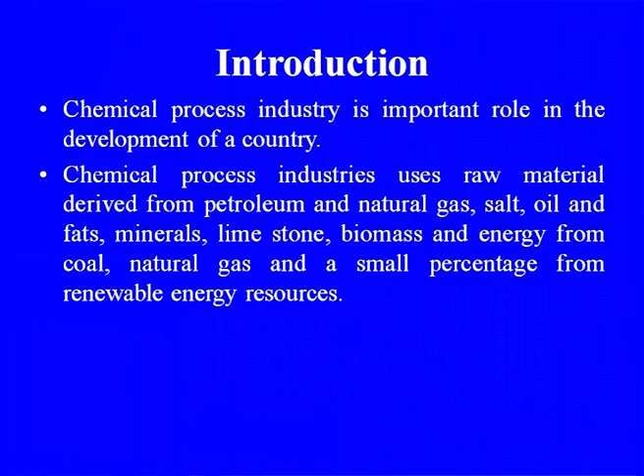The chemical process industry plays an important role in the development of the country. It uses raw materials derived from petroleum and natural gas, salt, oil and fats, minerals, limestone, biomass, and energy from coal, natural gas, and a small percentage from renewable energy resources, because energy is an important segment in the total cost of production in the chemical industry.

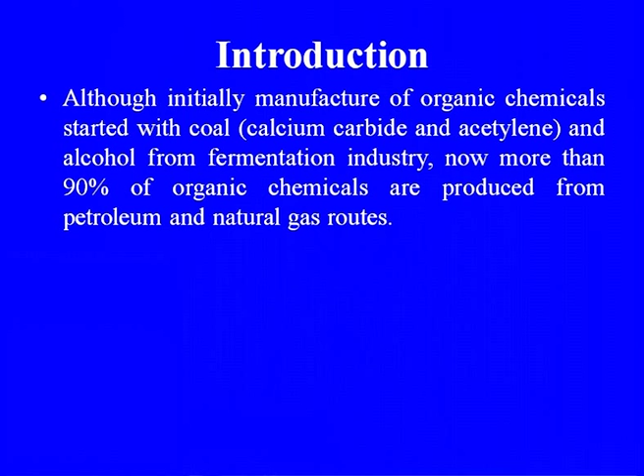As discussed in the earlier lecture, manufacture of organic chemicals initially started with coal, that is acetylene from the calcium carbide route, and alcohol from the fermentation industry. Now more than 90% of organic chemicals are produced from the petroleum and natural gas route, a development that has taken place because of the availability of petroleum products from refineries.

But as we see, all these raw materials are becoming more and more scarce. So again we are rethinking to utilize our old raw materials like coal, biomass, or alcohol for production in the organic chemical industry.

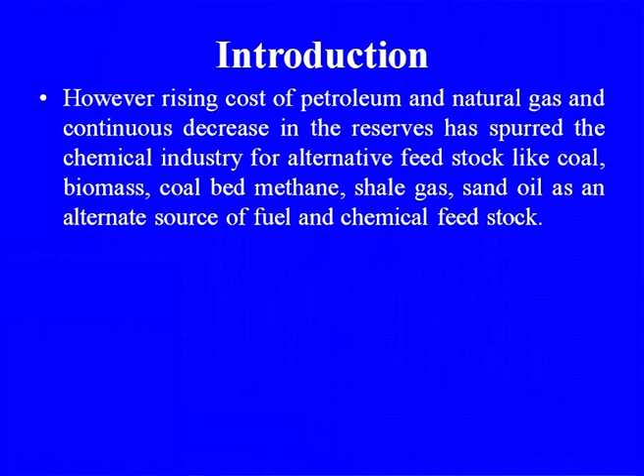Another problem is the rising cost of petroleum and natural gas, and the continuous decrease in reserves, which has spurred the chemical industry to look for alternative feedstock like coal, biomass, coal bed methane, shale gas, and sand oil as alternative resources of fuel and chemical feedstock.

Shale gas and sand oil are areas where other parts of the world are still working to utilize these resources more effectively, because sand oil is a slightly heavier, very heavy crude. Even some oil available in India, such as Rajasthan crude, has high TAN acid and high sulfur compounds. So these are some of the problems in utilization of new raw materials.

Coal remains the dominant source of energy. We are now discussing the energy resources available for the chemical process industry, because without energy nothing can be done, we cannot run a plant. So energy resources are very important.

Coal was the dominant source of energy, meeting about 52.4% of India's primary energy needs, while oil and natural gas met 41.6% of the energy requirement in 2008-9. The power sector accounted for 77% of non-coking coal offtake.

As per Planning Commission projections, till 2032 coal will continue to have a dominant share, meeting over 50% of the primary commercial requirement.

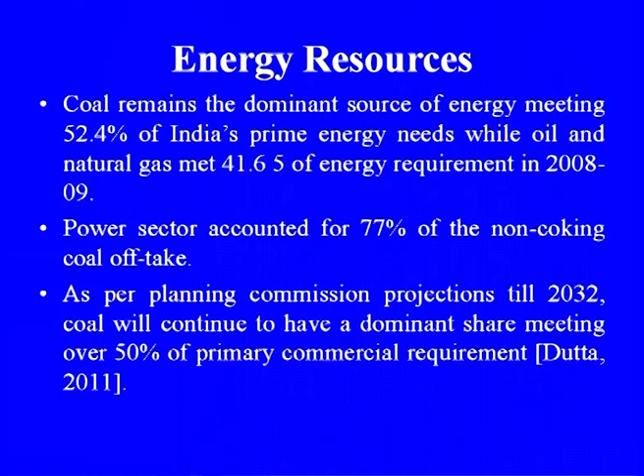The world and India energy consumption scenario is shown in the figure in Module 1.4, which you can go through.

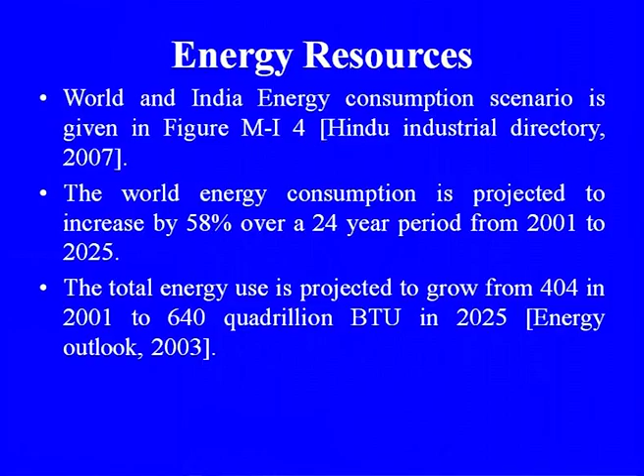World energy consumption is projected to increase by 58% over the 24 year period from 2001 to 2025. Total energy use is projected to grow from 404 quadrillion BTUs in 2001 to 640 quadrillion BTUs in 2025. This is the change taking place because of the fast development occurring.

India's requirement of fossil fuels by 2030, as estimated by various agencies, is in the range of 337 to 462 million tons of oil, 99 to 184 million tons of oil equivalent of gas, and 602 to 954 million tons of coal. That is the requirement being projected.

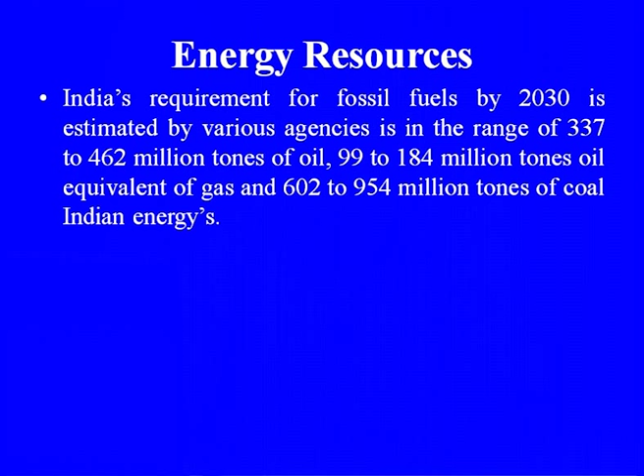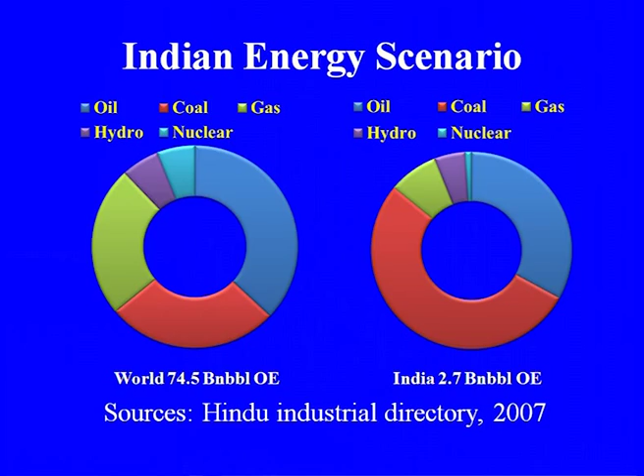This is the scenario of oil, gas, and hydropower and nuclear power that we are using. Nuclear power is actually a small portion of the total energy requirement that we have.

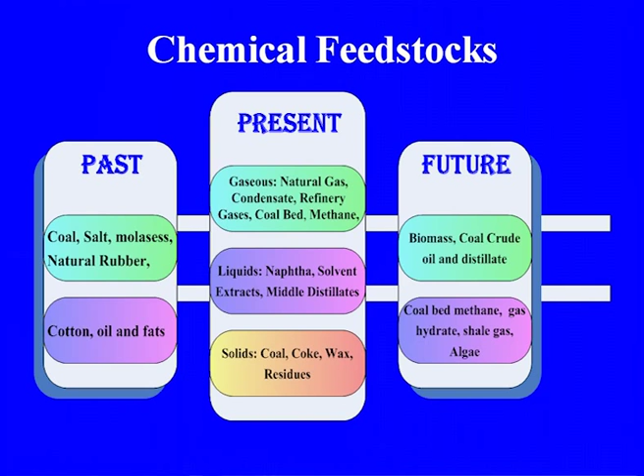In the future, we are again moving in a big way towards alternative raw materials: biomass, coal, crude oil and distillate, coal bed methane, gas hydrate, shale gas, and algae as fuel. People are also working on production of alcohol based on algae, though the cost of producing alcohol through the algae route remains a problem. So the future raw material may also include algae.

Primary raw material - the raw material you are using may be primary or secondary. So gaseous: natural gas, condensate, refinery gases. Condensate that we are getting from the heavier fraction of natural gas while processing it. Now some units are coming from ONGC who are going to utilize the condensate. Some condensate is rich in aromatics, and we can extract the aromatics from it. Then refinery gases, coal bed methane, gas hydrate, liquids - naphtha, kerosene, gas oil, middle distillate; solids - coal, coke, wax, and residue.

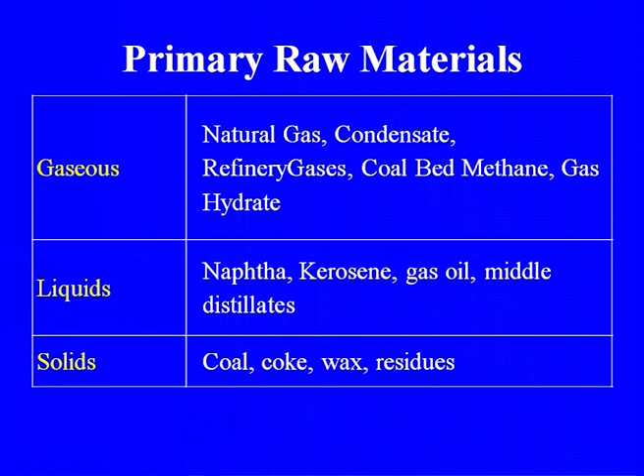Oil and fats - tallow, coconut oil, palm oil, and other oils that we use in the soap industry. Biomass, alcohol, paper, energy that we are using, and some future scope is also there for the biomass route.

The alcohol route from molasses - we still have more units for that, and most alcohol is made from molasses. But biomass to alcohol is again one of the big challenges, because of lignin - removal of lignin, the pre-treatment part, the cost of pre-treatment of biomass is more. But a lot of work has been done, so in future we may have some biomass-based alcohol plants also.

Salt - as I told you earlier, the sea is rich in resources, whether oil, minerals, or salt, and salt is used as a raw material. Salt is very small, but you will find its use is not only for edible purposes. A large number of industries are based on salt as a raw material, and products from these industries form the backbone of many chemical industries - chlorine, caustic soda, soda ash. These are products that we use in some form in most industries.

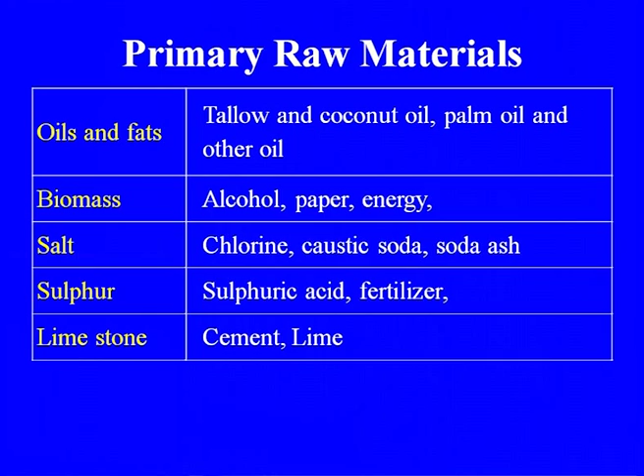Limestone for the manufacture of cement, and lime that we use - lime is also again a raw material for many chemical industries, and one of the major uses is also in the paper industry during the recovery of chemicals.

Paraffins - methane, propane, butane, and higher hydrocarbons. Now paraffins are important because methane is available in natural gas, and propane that we get from various processes is also there in natural gas. So how to convert this methane or propane to more value-added products? From propane to propylene, methane to olefins - these are the developments taking place. Olefins and derivatives: ethylene, propylene, butadiene, alcohol, vinyl chloride.

Acetic acid, vinyl acetate, etc. These are some of the chemical intermediates which find large application in making a large number of chemicals.

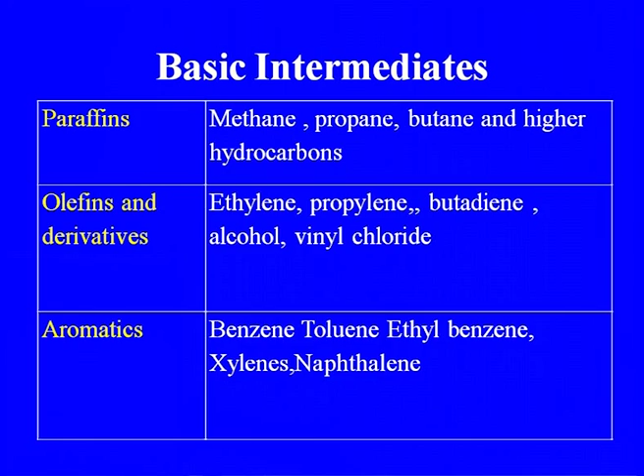Aromatics - benzene, toluene, ethyl benzene for styrene, xylenes - especially ortho and para, which are very important. Naphthalene - sometimes we get naphthalene from the coke oven plant, and naphthalene is one route for making phthalic anhydride.

Although we are now making it from orthoxylene, because orthoxylene is available from paraxylene plants.

Monomers for polymers - ethylene, propylene, vinyl chloride, styrene. These are some of the monomers for major polymers which we make, whether it is polythene, polypropylene, PVC, or polystyrene, or even styrene used in the rubber industry.

Monomers for synthetic rubber are styrene, butadiene, chloroprene, isoprene. Actually isoprene is available in the FCC or cracker gases, but we are still not recovering it - about 8% of the FCC C5 gas is isoprene, which can be recovered and that can provide supply.

Styrene - ethylene and benzene are the two raw materials for making ethyl benzene, and ethyl benzene for styrene. Already some petrochemical complexes, just like the Panipat refinery, are going for the manufacture of styrene butadiene rubber. Earlier we used to make styrene through the alcohol route - alcohol to ethylene, and ethylene to styrene.

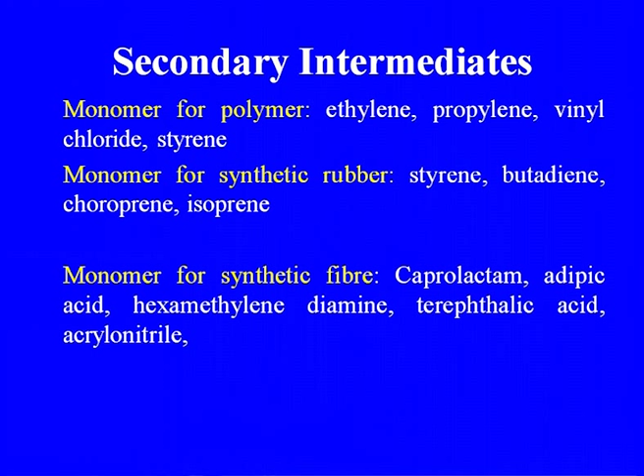Monomers for the synthetic fiber industry - caprolactam for nylon 6, adipic acid, hexamethylenediamine for making nylon 66. Still we are not making nylon 66; most nylon is based on caprolactam, that is nylon 6. Terephthalic acid, and acrylonitrile for making polyacrylonitrile - you are seeing huge changes in the woolen industry because of polyacrylonitrile fiber, which has wool texture and a fluffy nature. Even acrylonitrile finds application in making some specialty polymers and rubbers also.

Secondary intermediates mean the products which are getting from the refinery or the petrochemical, that are being used as intermediates for the agrochemicals, intermediates for the dye stuff industry. You take the case of aniline, that is coming from the aromatic plants where we are using benzene, and from aniline.

That is one of the major raw materials for dye stuff. Intermediate for explosive, one of the earlier explosives used to be TNT. That was actually from toluene and nitrotoluene, used as an explosive, and still we are making explosives. Intermediate for RDX, that is also from there, we are using formaldehyde. So this is how some of the primary feedstocks play an important role in providing the secondary intermediate which find application as a finished product.

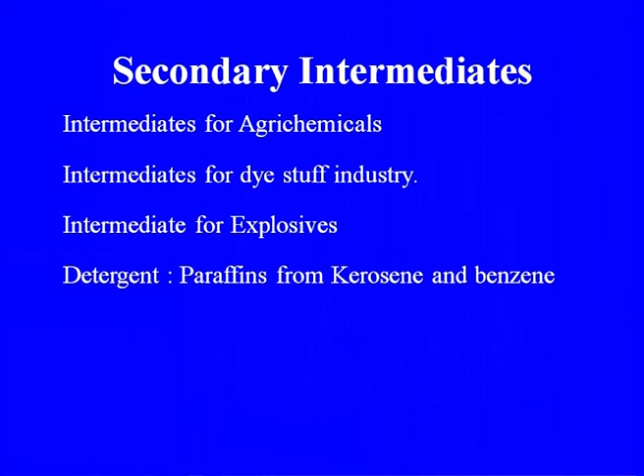Similarly, take the case of detergent, paraffins that we are extracting from kerosene, and the paraffin that is converted to olefins, and this olefin is alkylated with benzene, so they were getting the linear alkyl benzene. So these are some of the secondary intermediates that we are using.

This is how the feedstock for the organic chemical industry, it may be petroleum, coal, fermentation, oil and fats, and the various products derived from petroleum, coal, or fermentation industry, or from petroleum: ethylene derivative, propylene derivative, C4 hydrocarbon, synthesis gas derivative, aromatic cyclic compound. From coal: benzene, toluene, because earlier most of the requirement was met through the coke oven plant, but at that time the consumption was much less, and the organic chemical industry was not much developed.

At the same time the yield of aromatics from coal is much less, so that was the problem in case of coal. But as a byproduct we are still using that benzene, toluene, naphthalene, also pyridine, because from coal a large number of chemicals, inorganic and organic, can be produced, and we are producing that through the recovery part.

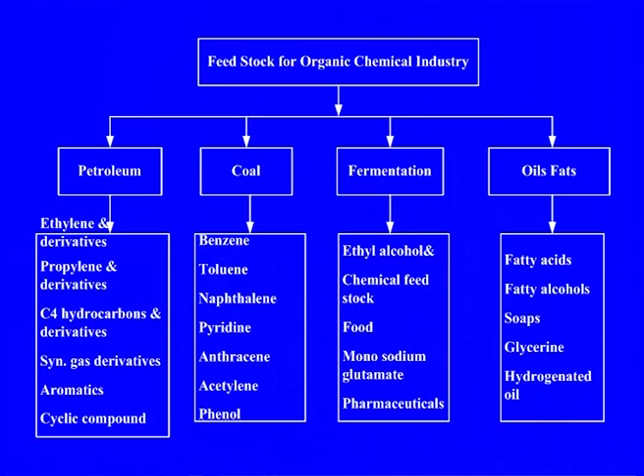Oil and fats: fatty acids, fatty alcohols, soaps, glycerine, because glycerine is going to be one of the very important raw materials in the future for the chemical industry, and you can still produce a number of value added products from glycerine.

From biomass, as I told you, processing the biomass has some problems because of the presence of lignin, and pre-treatment is required. But the number of products that we can derive from biomass, starting from methane, pyrolysis gas, pyrolytic oil, ethanol, food, single cell protein, sugars, chemicals, ethanol, methanol, acetic acid, butanol, vanillin, oxalic acid, acetone.

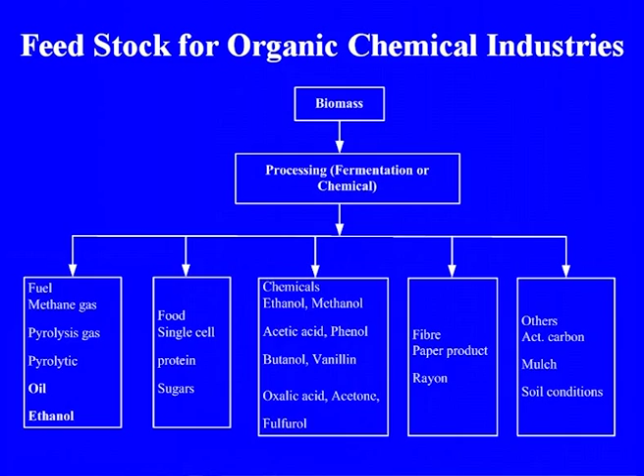Phenol means phenol, that is the cumene route that you can go. The fiber, paper products, rayon, others, activated carbon, mulch and soil conditioner. These are the products that you can get from biomass.

Now I will discuss some of the products which are getting from the petroleum route, and the various petroleum fractions which are being used as a basic raw material in the petrochemical industry.

First major product is the natural gas and the refining gas, because there are two sources of natural gas. One we are getting directly from natural gas. Second is the natural gas we are processing after the processing of crude oil, which is separated, that we call the associated gas. Third is the refining gases which we are getting during various processes.

The refining gases contain methane. So these are some of the natural gas sources where crude oil distillation, catalytic cracking, catalytic reforming, all the processes produce gases which may find use, or are being used, for the production of chemicals. Composition: methane, ethane, propane, butane, boiling point up to 25 degrees centigrade, that is the fraction in the case of refinery, because after that the gasoline fraction is there.

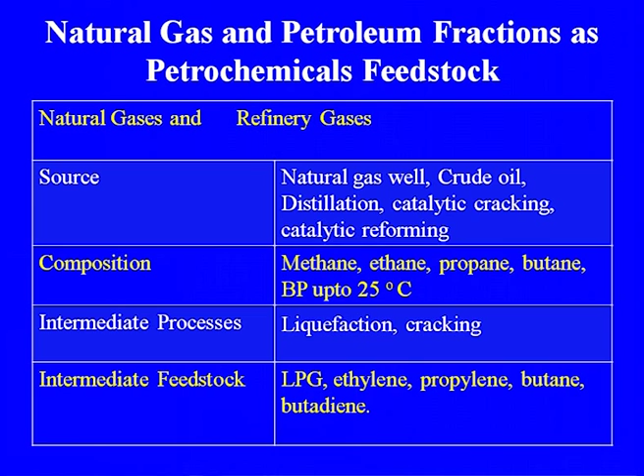Intermediate process: liquefaction, cracking, intermediate feedstock, LPG, ethylene, propylene, butane and butadiene, which find application in the manufacture of other products. LPG is being used as a fuel, but it can also be used for the manufacture of aromatics through the cyclization process. So these are the products which are being used for the manufacture of some other important intermediates.

Naphtha is one of the most versatile feedstocks we are getting from the refinery. The gasoline, which is also a naphtha, but higher octane naphtha is only being used as gasoline or straight-run gasoline. The rest of the naphtha has to be processed to more value-added products, either through catalytic reforming or catalytic cracking of the naphtha. These are some of the sources from the refinery which undergo distillation and thermal and catalytic cracking, hydrocracking, visbreaking. This is why we call it straight-run naphtha and cracked naphtha, both obtained from various processes, with boiling point range 70 to 200 degrees centigrade.

As I told you, the higher boiling point fraction we get as naphtha has a lower octane number, so that's why it cannot be used directly. At the same time, the octane number requirement has been changing - earlier vehicles needed 70 octane number, now we are talking about 100 plus octane. How to meet that requirement? Just for the improvement of the octane number, there is a secondary process that we do, which we will discuss while covering petroleum refining and petrochemicals.

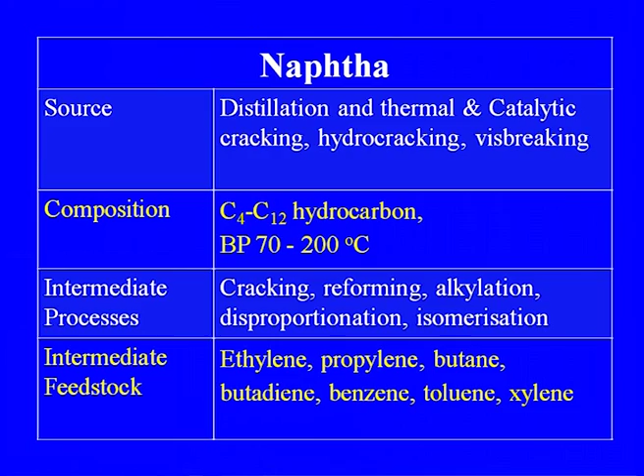So, composition of the naphtha is C4 to C12, boiling point 70 to 200 degrees centigrade. Intermediate processes include cracking, reforming, alkylation, disproportionation, isomerization. Intermediate feedstocks we get from naphtha include ethylene, propylene, butane, butadiene, benzene, toluene, xylene. These are some of the intermediate products we get either from naphtha cracking or catalytic reforming of naphtha, or now in the refinery we also have the isomerization process, which is mostly for production of high octane gasoline from low octane naphtha.

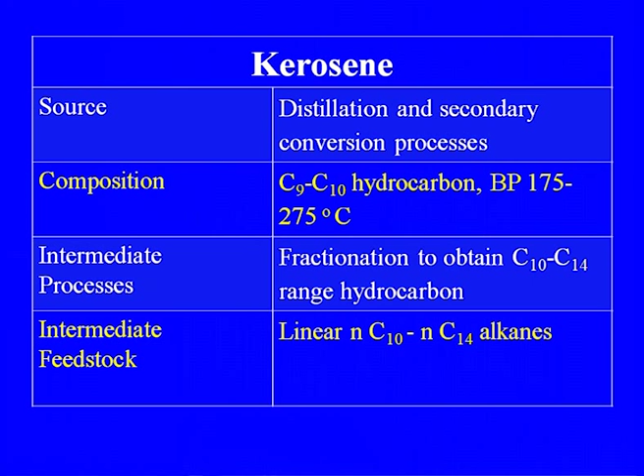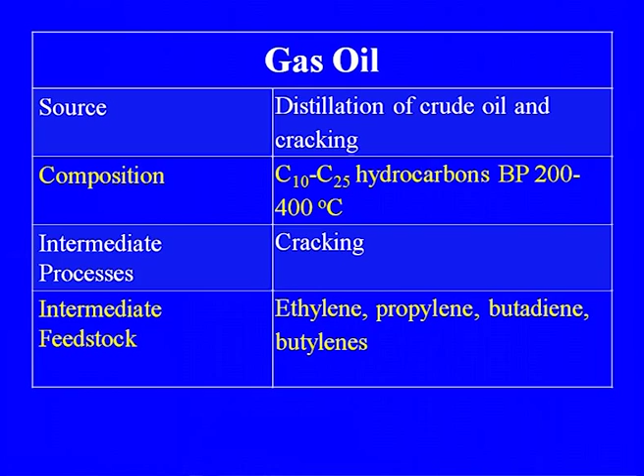Kerosene - although the major portion of kerosene is used as fuel, a good amount of kerosene is required for the manufacture of linear alkyl benzene. So what we do is fractionation of the kerosene, and after fractionation we take the carbon atoms from 10 to 14, because for better biodegradability this carbon number is very important. It may be C10 to C14, but more preferably C11 to C13 carbon alkanes are required. In the LAB plant, we fractionate the kerosene and extract this portion of alkanes from the kerosene, and the rest of the kerosene is recycled to the fuel system for blending.

Gas oil is the heavier portion we get from crude oil distillation and from cracking during the process. In cracking or hydrocracking, the remaining portion of heavy residue from atmospheric and vacuum distillation columns is further processed in the secondary conversion process for more value-added products. Major products come from cracking - gas oil cracking can also be done, but considering the cost and product complexity, since it gives less ethylene and propylene and more heavier fractions, some plants are still operating based on gas oil for olefins. That may be a future source for olefins in the gas cracker, because in the reactor for naphtha cracker too, a lot of development has taken place, which we will discuss while covering petrochemicals.

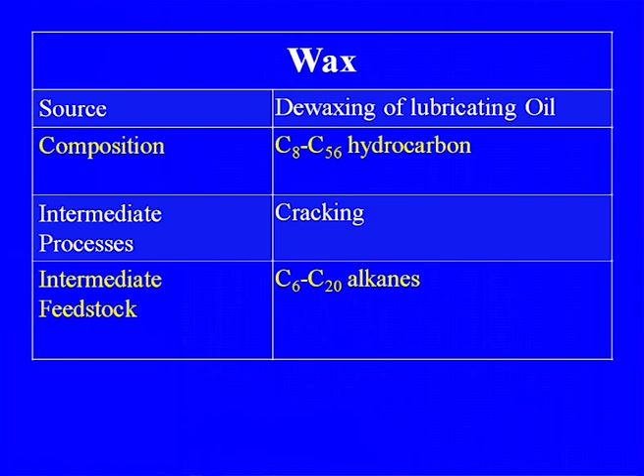Wax - in case of more paraffinic crude oil we get wax, and after cracking the wax we can get alkanes which can be further cracked, and we can use them for the production of some higher alcohols and higher hydrocarbons.

Pyrolysis gasoline is the product we get from the ethylene cracker, meaning the naphtha cracker or the gas cracker, and that pyrolysis gasoline is rich in aromatics. These aromatics can be utilized effectively.

It can be mixed with the reformate and processed in the aromatic production plant. The only additional requirement in case of pyrolysis gasoline is the removal of sulfur from it.

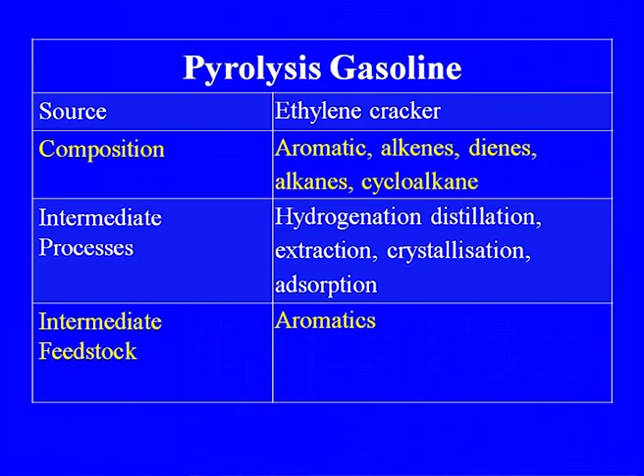These are some of the sources of pyrolysis gasoline, and some of the processes involved in the separation of pyrolysis gasoline are distillation, extraction, and hydrogenation, meaning hydrodesulfurization of pyrolysis gasoline for removal of sulfur. Crystallization and adsorption are processes normally used for separation of paraxylene from metaxylene.

Similarly, extraction is used for close boiling point aromatics and non-aromatics. The intermediate products we get from this pyrolysis gasoline are benzene, toluene, and xylene.

Petroleum coke, as I told you earlier, is called petro coke or petroleum coke. With the utilization of more and more heavier fuel, petro coke production has increased. Earlier, the petro coke produced at Panipat or Jamnagar was being used by cement plants as fuel.

But now petro coke can be used for gasification, and from gasification you can produce synthesis gas, you can produce hydrogen, or it can be used in fertilizer plants along with coal, because petro coke has higher carbon than conventional coal.

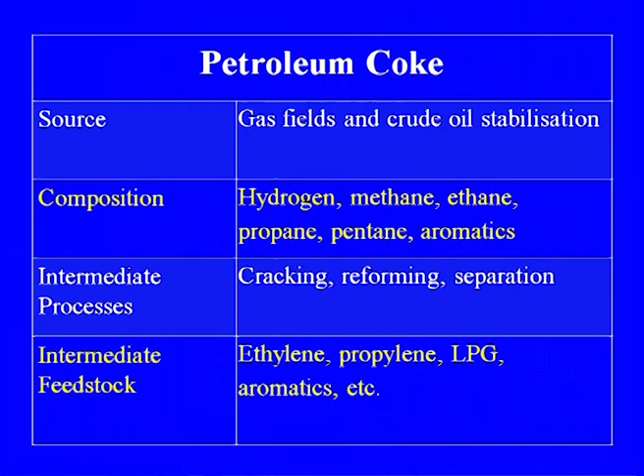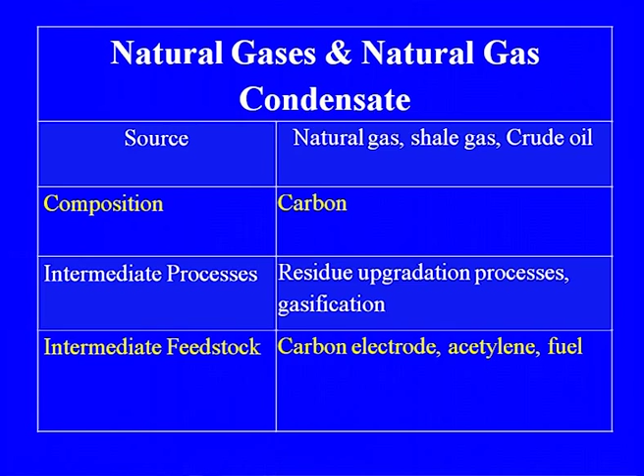Now alternative routes are also available, because this is the beauty of nature. Nature has provided alternate sources, and it's only a matter of how effectively and economically we can use these raw materials for the production of organic chemicals.

From ancient times, even when no refining existed, some organic chemicals were being made through natural routes. Similarly, some of the products we get from alternative routes for producing chemicals include methane from natural gas, and refined light gases that we use.

Alternative routes may include coal as a byproduct of the separation of coke oven gases, because in coke oven gases there is ethylene, which can be separated from there, and methane that can also be separated from there.

So coal based plants can also be used for the manufacture of ammonia.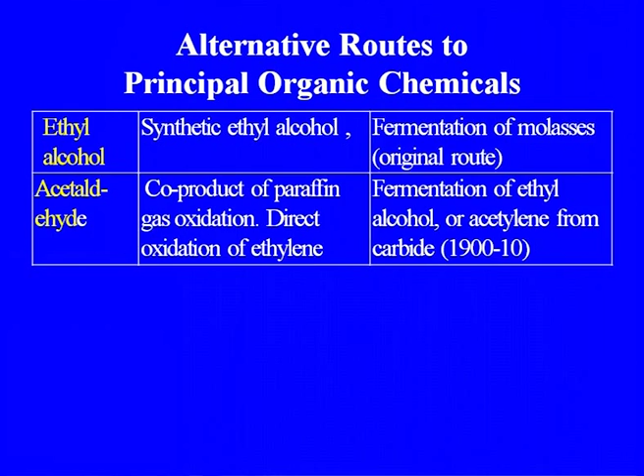Acetone can come from wood distillation or from propylene. Normally acetone is obtained as a byproduct through the cumene process from propylene. But an alternative route is wood distillation, through pyrolysis of acetic acid, from where acetone can be obtained.

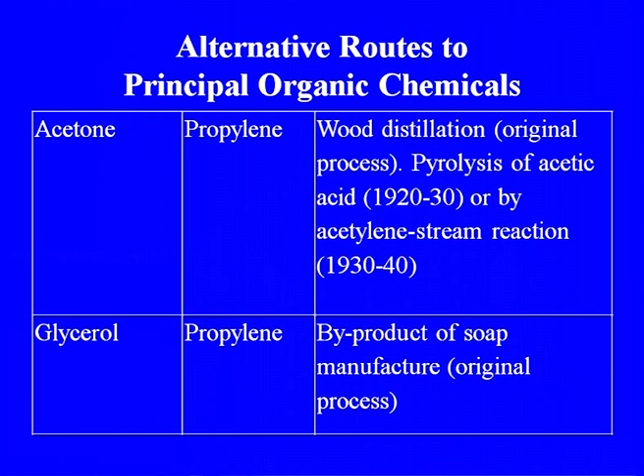Aromatic hydrocarbons are produced from aromatic-rich and naphthenic-rich fractions by catalytic reforming and direct extraction, or by hydroalkylation, dealkylation, disproportionation, and isomerization. These are some of the aromatic conversion processes used for producing aromatics.

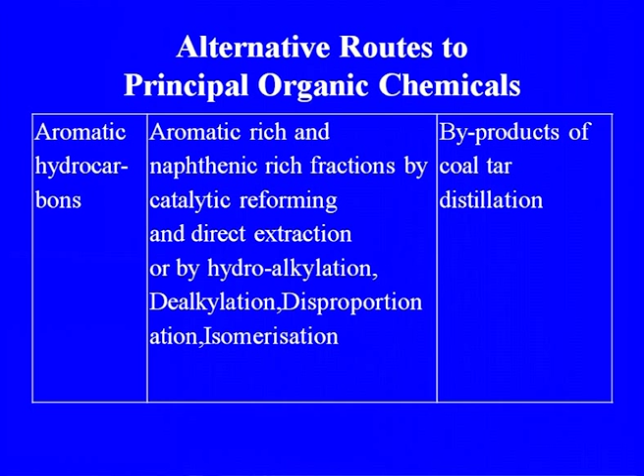Another alternative route is coal tar distillation as a byproduct, which was actually the earlier route for getting aromatics when refineries were not available or crude oil was not accessible.

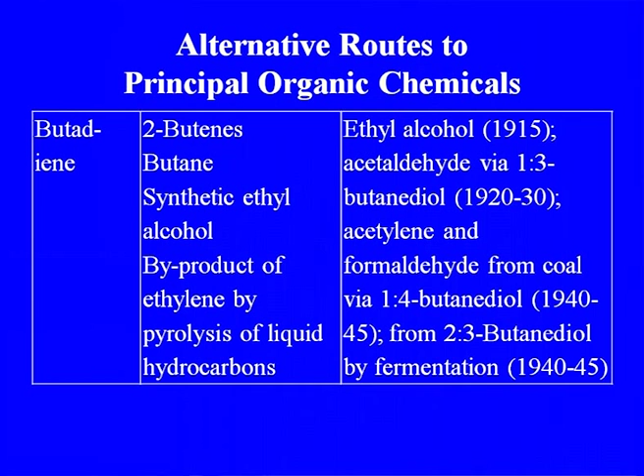For butadiene, the original route was via ethyl alcohol, but now butadiene is obtained as a byproduct from the cracker plant. Styrene-butadiene manufacturing started in the 60s at the synthetic chemical Bareilly plant, which is now closed, but they manufactured butadiene through the alcohol route.

So these are the alternative raw materials that can be used for producing some important organic chemicals which serve as feedstock.

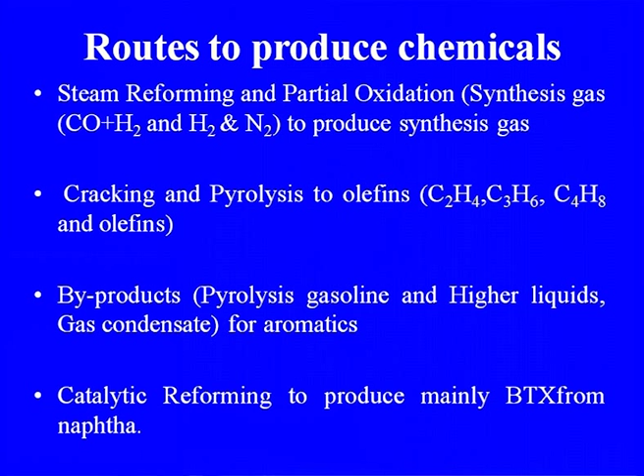Various routes are available to produce chemicals: steam reforming and partial oxidation to produce synthesis gas, cracking and pyrolysis to produce olefins, byproducts like pyrolysis gasoline and higher liquid gas condensate for aromatics, and catalytic reforming to produce mainly BTX from naphtha.

This is similar to catalytic reforming used for producing high octane gasoline, where the reformate is blended with gasoline. The same process is used, but the choice of feedstock depends on whether the requirement is for benzene, toluene, or xylene, determining which naphtha fraction is taken.

Dehydrogenation of paraffins like ethane and propane is one process used for manufacturing propylene. This is an alternate route, and a considerable portion of propylene is manufactured through dehydrogenation of paraffins, other than the cracking route.

Other routes include petrocoke and biomass gasification, gas-to-liquid technology, methanol-to-olefin technology, coal-to-liquid and coal-to-chemicals processes, dehydrogenation and alkylation from kerosene, saponification of oils and fats, and recovery of chemicals from glycerin. These are some of the routes available.

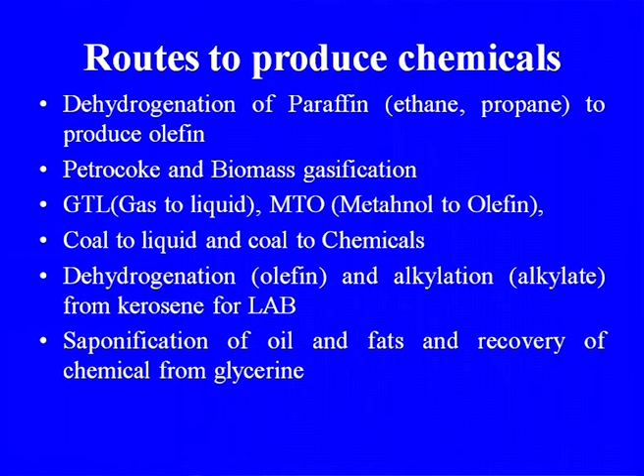Natural gas: now we will discuss in detail the individual components discussed earlier - chemicals from methane, chemicals from C2 to C4, since different fractions are present in natural gas, including methane and total natural gas combined.

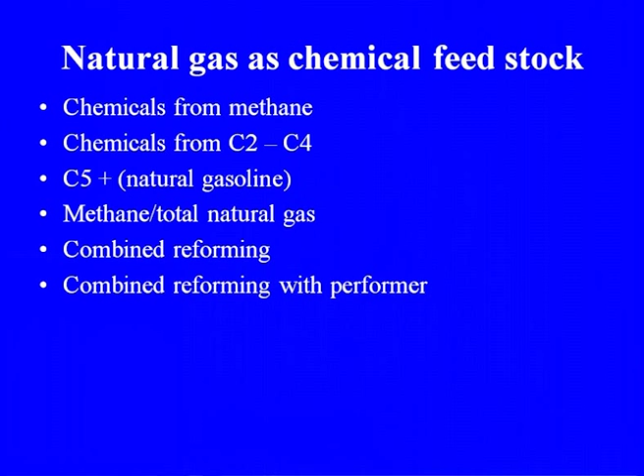Reforming with the reformer - these are some alternatives for the reforming process, including autothermal reforming, where a combination of partial oxidation and reforming is used.

Cracking of natural gas to olefins, and from the gases we get C4 and C5 gases, from which we can recover very valuable products.

From FCC we get propylene, and C4-C5 gases giving us butadiene, isobutylene, butene-1, butene-2. From C5 we get cyclopentadiene, isoprene, and other valuable products obtained from the cracking plant.

Steam reforming and partial oxidation are used for producing synthetic gas. These are some of the methods used, considering energy consumption, since steam requirements are very high. Some developments have taken place in steam reforming too, including conventional steam reforming and partial oxidation.

Now we are talking about catalytic partial oxidation, combined autothermal reforming, Kellogg heat reforming exchangers, and the Cyclar process, where propane and butane are used for producing aromatics, along with oxidative coupling of methane to olefin.

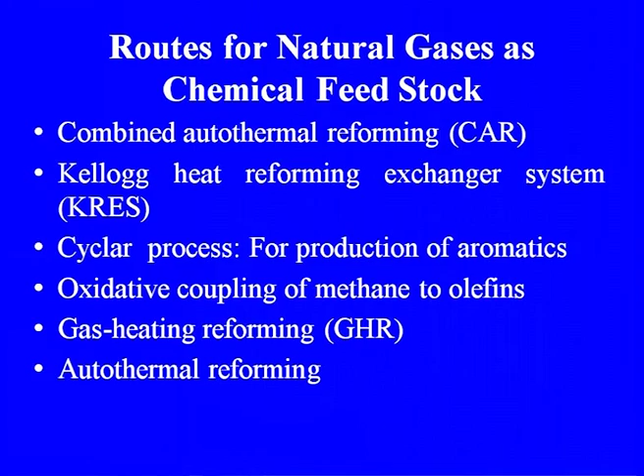This process technology is available but has not been commercialized, because we are still getting olefins through other cheaper routes, such as gas heating reforming and autothermal reforming.

As we discuss naphtha, low grade, low octane number naphtha is available from the petroleum refinery. This is the most versatile chemical feedstock, and its use depends upon composition, boiling, and market requirement. Naphtha remains a prominent feedstock. Of the cracker plants we have, 52% are based on naphtha cracking for olefin production.

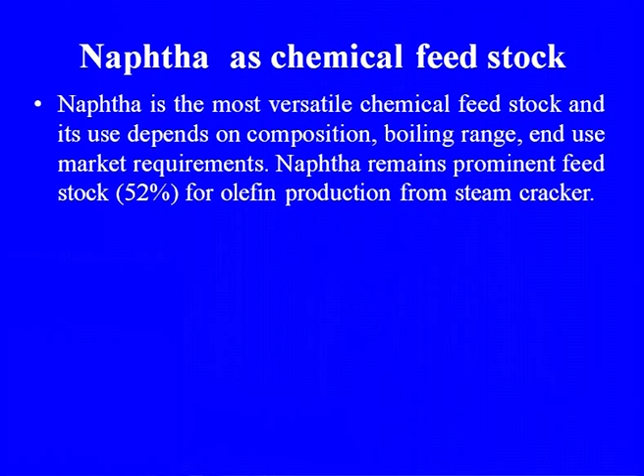Catalytic reforming of naphtha produces aromatics, which are important chemical feedstock for the organic chemical industry, used for producing synthetic fiber, pesticides, explosives, dyes, intermediates, and plasticizers.

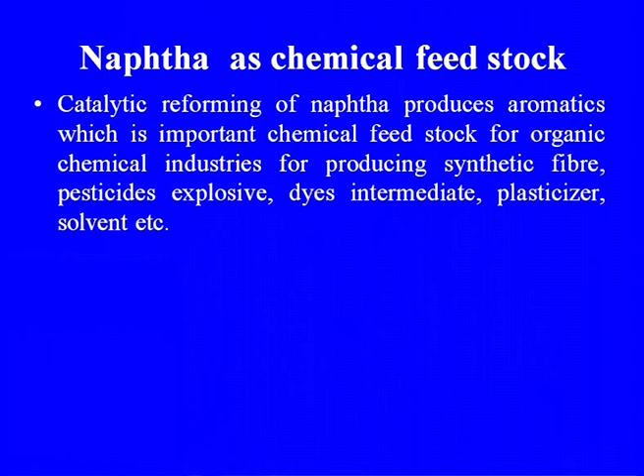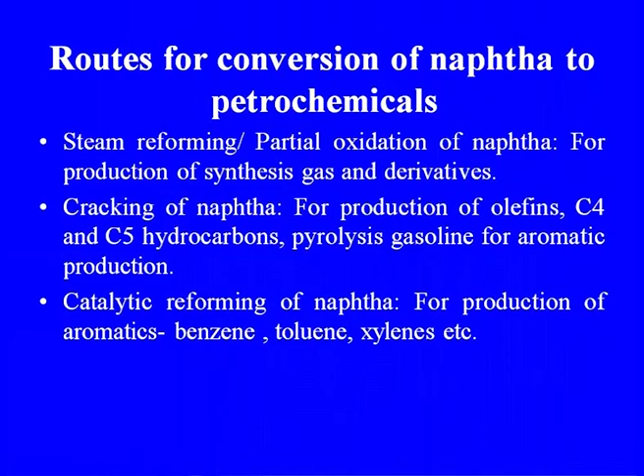Steam reforming or partial oxidation - both processes have been used for conversion of naphtha to synthesis gas, along with cracking of naphtha and catalytic reforming of naphtha. This is how the feedstock works. Still, the major share of the primary feedstock is naphtha for the cracker plant; the rest of the components are less.

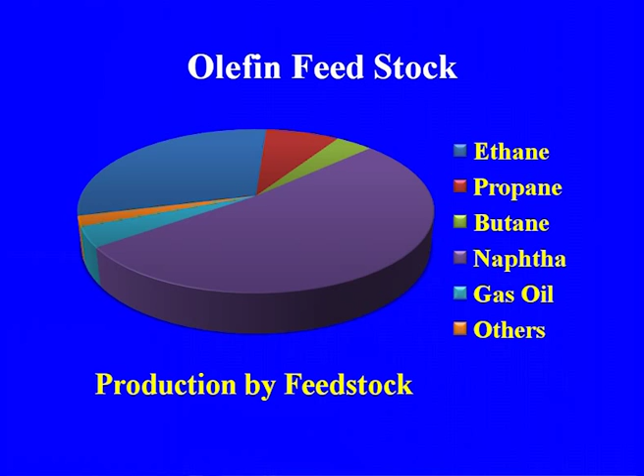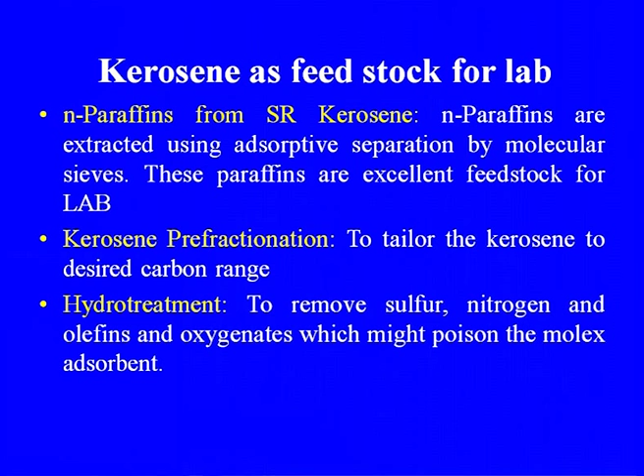Kerosene - as I told earlier, normal paraffins are extracted from kerosene, and these are used for the manufacture of linear alkylbenzene. The process involves kerosene paraffin pre-fractionation to produce the required carbon number in the paraffins. The paraffin is then hydrotreated, and then it goes for further processing for making olefins, and then for the alkylation process.

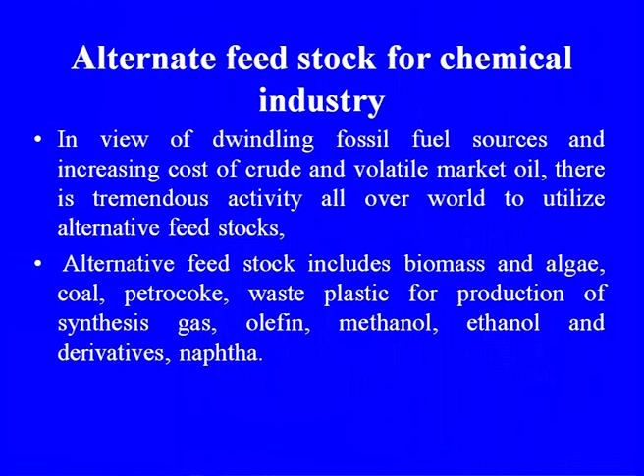In view of dwindling fossil sources and increasing cost of crude and volatile oil markets, there is tremendous activity worldwide to utilize alternative feedstock. Some of these, already discussed earlier, include biomass, algae, coal, petcoke, and waste plastic - pyrolysis of plastic is now used in some units for recovery of monomer from waste plastic, which can also be used for production of synthesis gas, olefins, and other products.

Biomass - again, I have already discussed the importance of biomass because of its huge availability from agriculture and forest residue. There is a lot of scope for using biomass as an energy resource through gasification, for production of oil through pyrolysis or fast pyrolysis, or through synthesis or through the ethanol route for manufacture of a large number of chemicals - not petrochemicals, since we always use that term, for chemicals derived from the petroleum route.

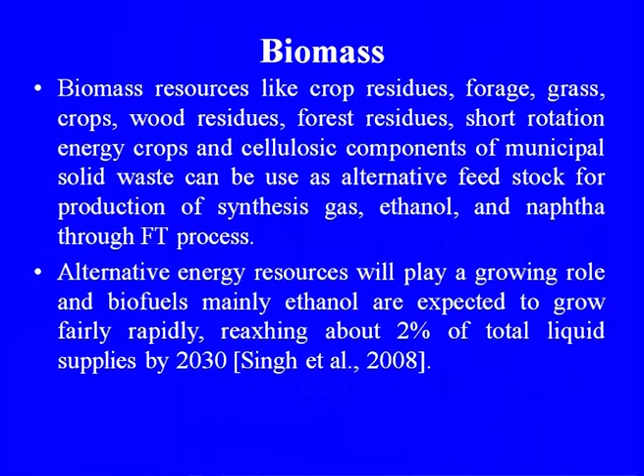Alternative resources will play a growing role, and biofuels, mainly ethanol, are expected to grow fairly rapidly. Biofuels - ethanol and biodiesel - are also an alternative source of energy, and they are being used, so there is a lot of scope for utilization of these resources.

Again, the same biomass conversion routes for biomass to heat, power, and transport fuel, as I told you - it may be fast pyrolysis, it may be gasification; various routes are available.

The biotechnological route for bioethanol production utilizing lignocellulosic material involves delignification - this is one of the problems - pretreatment that is required in case of biomass, saccharification, and fermentation. Delignification is very important, and it raises the cost of alcohol production. Even the lignin present may create problems in fermentation.

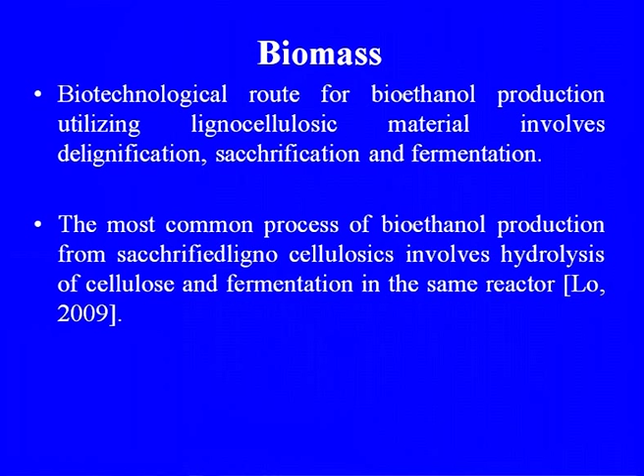The most common process for bioethanol production from saccharification of lignocellulosic material involves hydrolysis of cellulose - after removal of lignin, we go for further hydrolysis of cellulose and fermentation in the same reactor, that is simultaneous hydrolysis and fermentation taking place. The rest of the process, rectification and other steps, is the same as in case of alcohol production; only the same type of distillation column is used.

There are three types of feedstock for ethanol: sugar, starches, and lignocellulosic and algae. These are some of the raw materials that can be used, but mostly molasses is used for industrial alcohol.

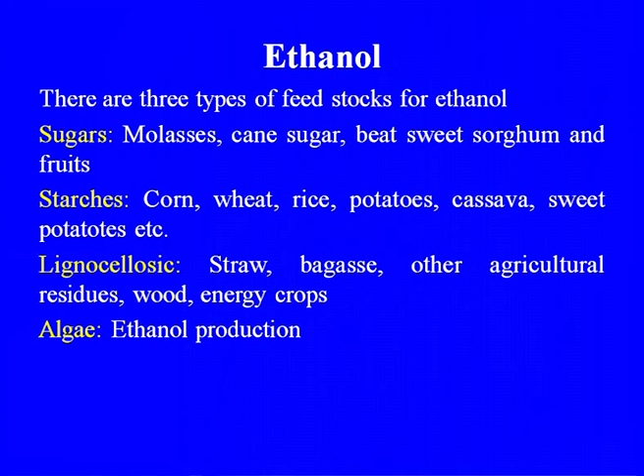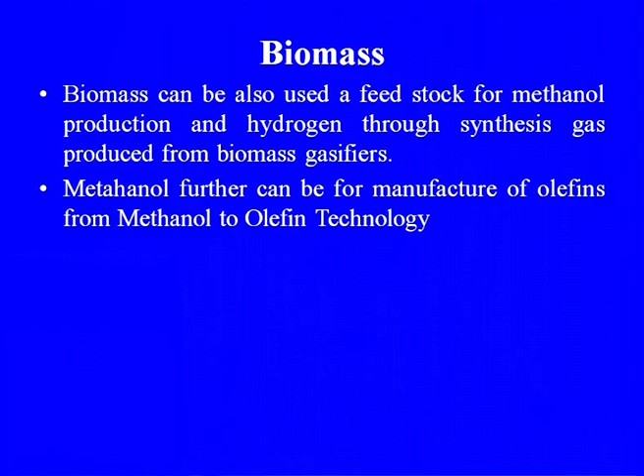Again, it is not only ethanol but biomass that can be used as a feedstock for the production of methanol and hydrogen, also through the synthesis gas route from gasification of biomass. Ethanol from algae is another option, as I told you earlier. We are working on this, and Reliance and IIP Dehradun have also worked on production of algae for ethanol. Only the commercial application of this process is yet to be done.

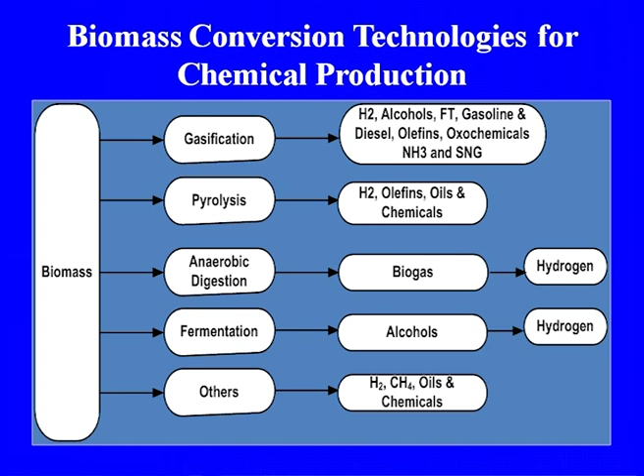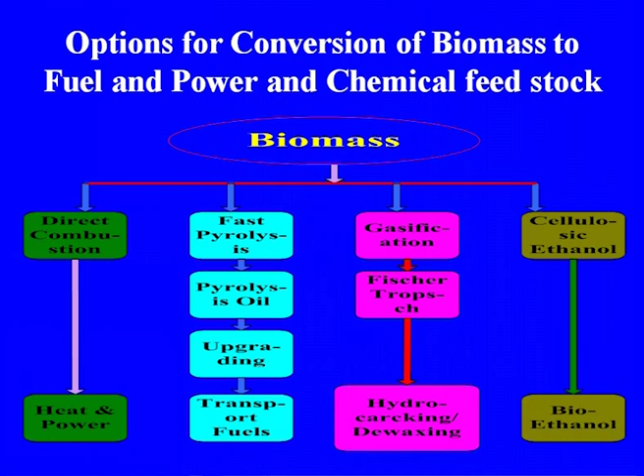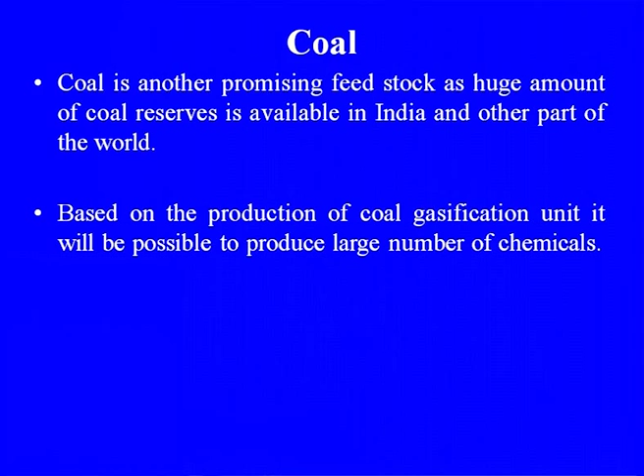Coal is again a promising feedstock, as huge coal reserves are available in India and other parts of the world. China has already started one plant, coal to olefin, commercial production, because of the availability of coal. Based on coal gasification, it will be possible to produce a large number of chemicals from coal.

One constraint in Indian coal is the high ash content. China has the advantage of low ash content and high carbon content coal, which is most suitable for gasification and production from coal. One route already available is when making coke, but the yield of chemicals from that is much less than other processes.

As I told you, we are working on this, and all over the world this work for utilization of coal as a source of petrochemicals started in the 1920s and 1930s, and people are again exploring ways to utilize coal as raw material.

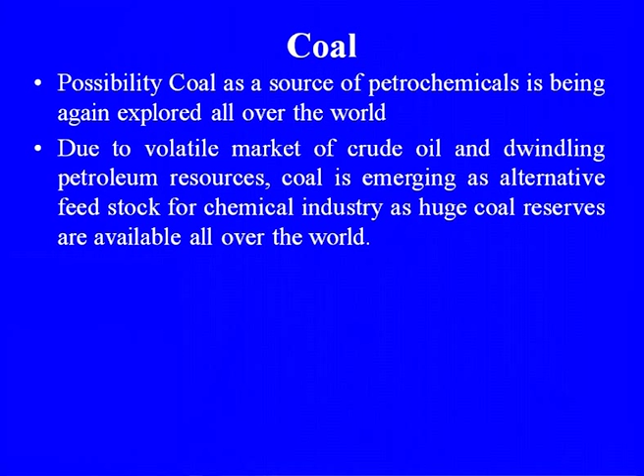Due to the volatile market of crude oil and dwindling petroleum resources, coal is emerging as an alternative feedstock for the chemical industry, as vast coal reserves are available all over the world. These are some of the processes that can be used for production of various intermediates which can be used for the production of finished products.

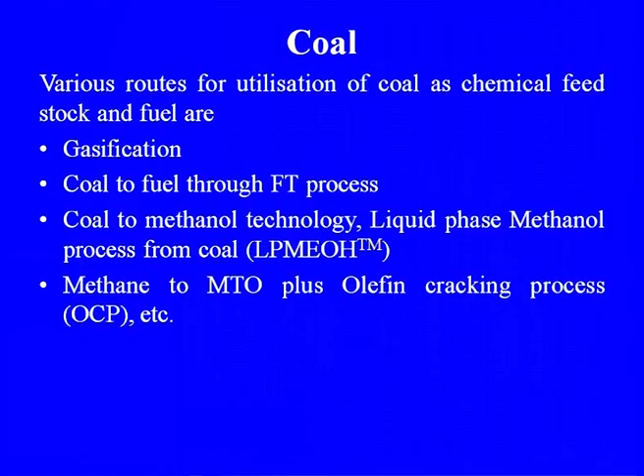Gasification, coal to fuel through the FT process - Fischer-Tropsch process, coal to methanol technology, liquid phase methanol process from coal. These are some of the new technologies now available: methanol to MTO, and MTO plus olefin cracking process. These are some of the upcoming processes that can be used when coal is the feedstock.

Again, I have already discussed petcoke, because petcoke is available from the refinery and its amount is increasing due to the use of more and more heavier crude oil. This petcoke can be a good raw material for gasification, for production of synthesis gas, for production of hydrogen, and that can be used in the refinery.

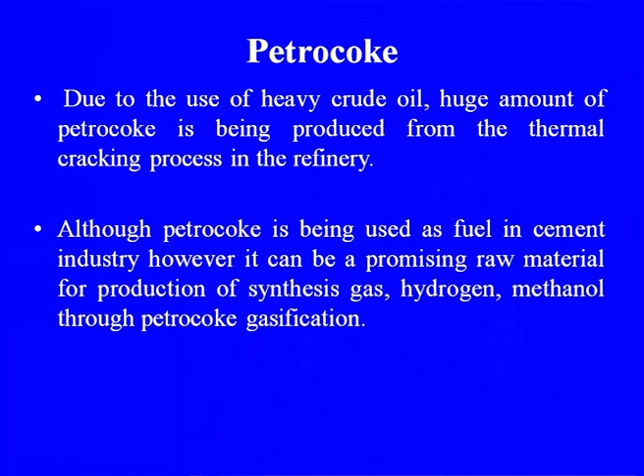Petcoke, through Fischer-Tropsch synthesis, can also be converted to fuel. Utilization of petcoke offers an alternative to handle higher sulfur - because heavier crude means higher sulfur - and the metal content is also high in a refinery, with value addition. That is why people, even Reliance, are going for petcoke gasification. Reliance is already in the process of implementing petcoke gasification to utilize its petcoke.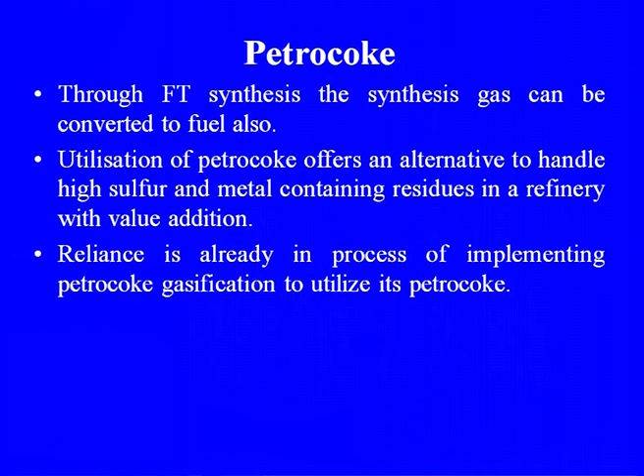The next lecture will discuss various unit processes and unit operations, and what chemical technological developments have led to the evolution of the chemical industry. There have been sea changes in process technology and separation processes, from what was being used in the early 19th century to what is used now in the 21st century.

So even in separation processes there has been a lot of change. We will be discussing in the third lecture various unit processes and unit operations, and also how development in the chemical engineering curriculum took place, and how chemical engineering evolved in industry.